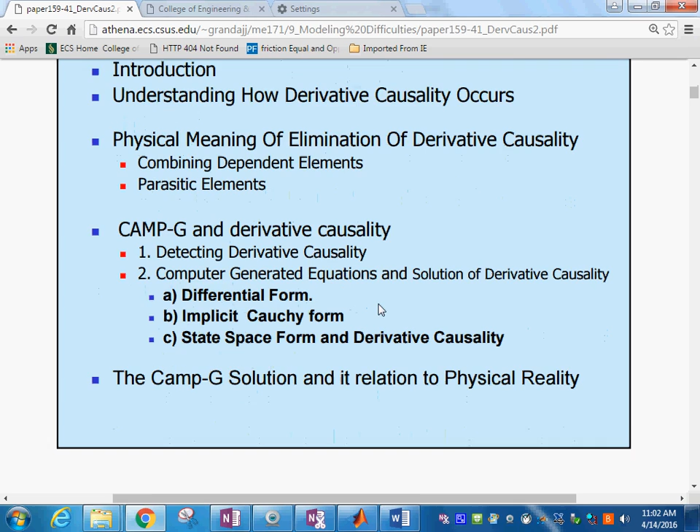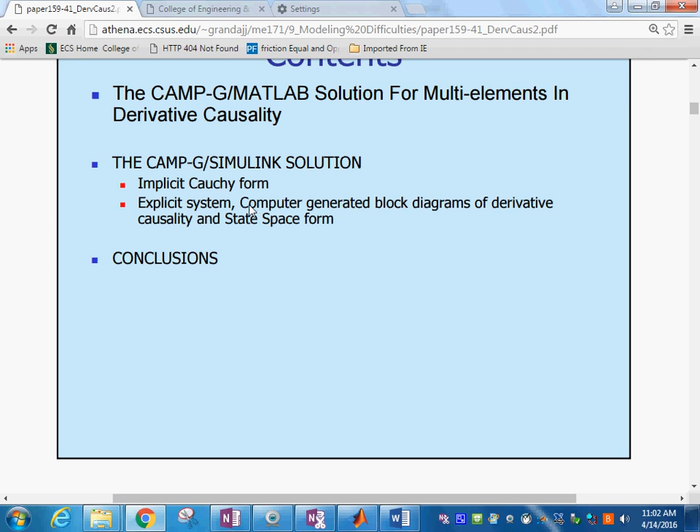And then finally, what's the CAMP-G solution and its relation to physical reality. Then we'll talk about the multi-elements in derivative causality, and I will finally touch on the CAMP-G/Simulink solution.

Okay, because we're mechanical engineers, we like this kind of systems. I am putting here a system that is before you, a system that deals with the valve mechanism and rocker arm on an internal combustion engine, so that you can locate yourselves.

This is the way the intake and the exhaust valve on engines work. What you have is a push rod in here, whose objective is to create a motion this way. And there is a rocker arm in here which is pivoted here, which objective is to rock this back and forth, and therefore push this valve stem down.

And if you do that, you see the airflow, or the mixture of gasoline and air, comes in here, and you let into the combustion chamber. When this is on the closed loop position as it is right now, these two things are not touching, and the spring is pushing this up.

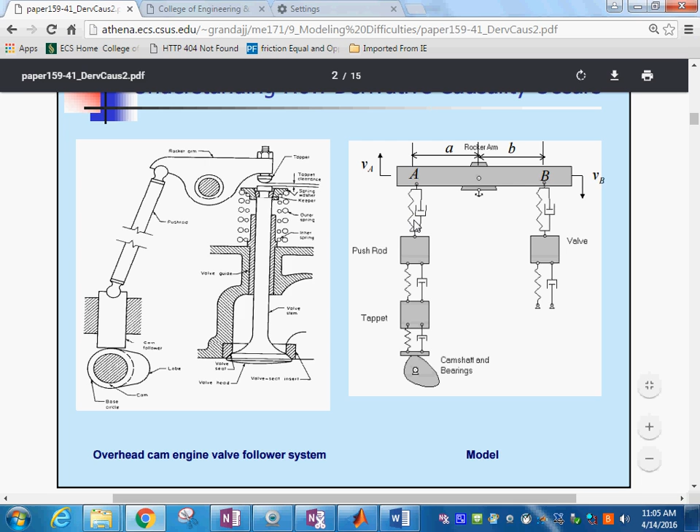Do you see? This is this. Okay. And then on this other side, you have the connecting rod, which in this case we model as a spring and a damper. Then you have the push rod, the mass itself, and that is connected also with the spring and damping to this tappet, and that one has a spring and damping connecting to this lobe, to the cam.

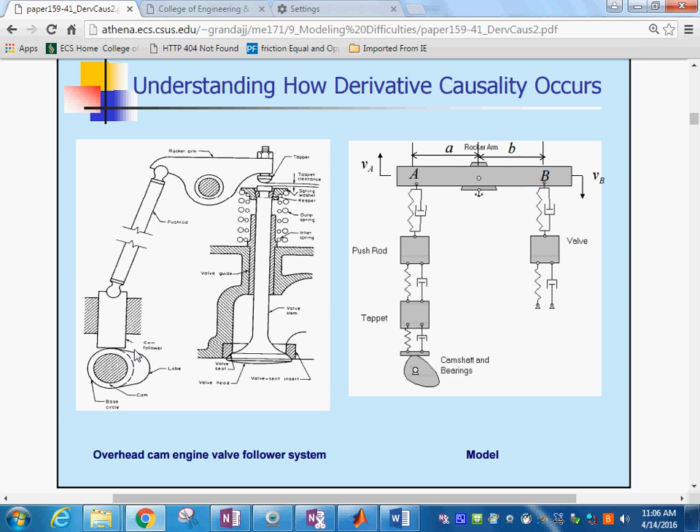So the question is, is our model detailed enough? Is it correct, or is it over-specified, or under-specified? That's the question. So in order to answer that question, we transform the model that we have into a bond graph model over here. Let's examine how we do that transformation.

Obviously, you could see here that I did not start my explanation by saying put the ones here and then do the connections. But if you're doing it and you're studying this, I highly recommend you do that, because that is the way we obtain this graph. So if we review that, you will have that you have a rotation in here, so that's a 1.

You have this point and this point, those two points are ones, and this TF represents this beam, but in here we put another one for this and another one on the other side. Those are these two. You have another one in here, that's this one, and then one with the input over here. So this set is this, this set is this one, and this set is this one.

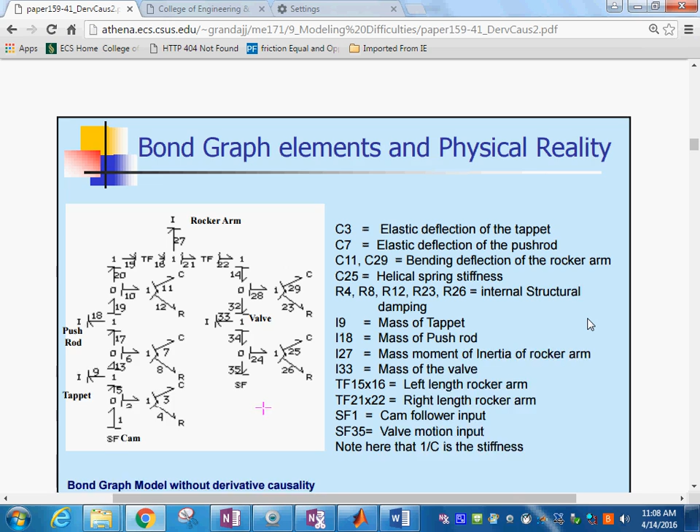So as you can see, this is a more significant model than what we have done in the past. So in here we're going to say, okay, I finally have my bond graph model.

Now on this example, for you that already understand bond graphs, we might not need this detailed explanation. However, just to make sure everybody in the whole world understands, you can put labels to all the variables.

C3 is the elastic deflection, C11 and C29 is the bending deflection. You have the helical spring stiffness, the mass of the tappet, the push rod, the mass moment of inertia of the rocker arm, mass of the valve.

The rocker arm is divided into two parts, left and right, and that way we can consider that. And in the middle you have the rotational inertia.

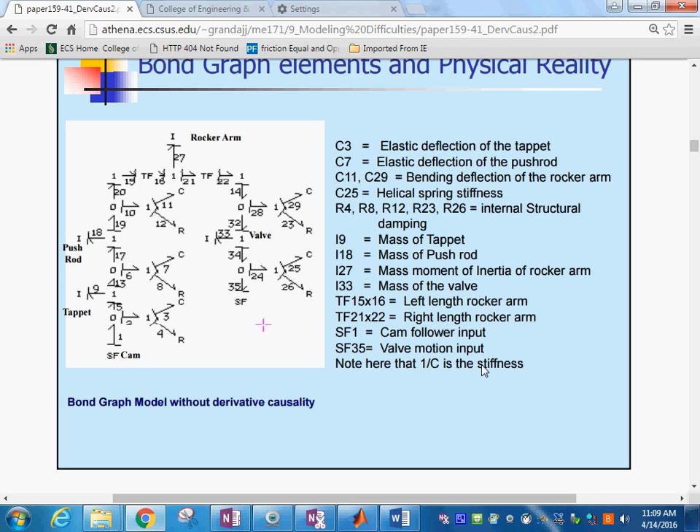SF1 is the cam follower input, and SF35 is the valve motion input.

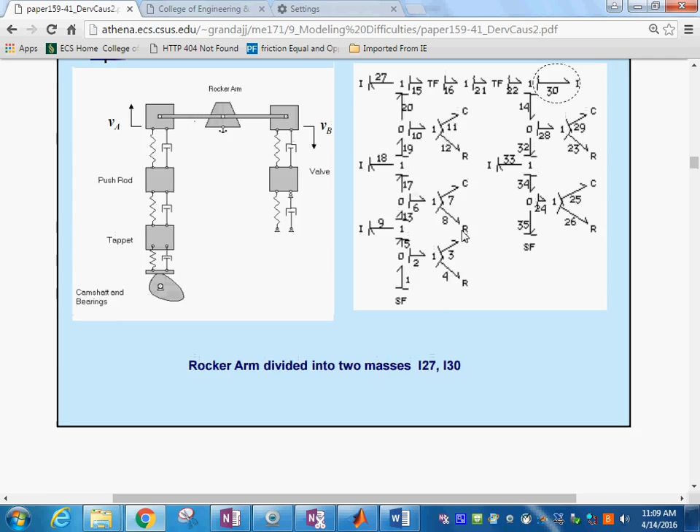From the first representation, this one, see how I represent it here? I am going to idealize and do it this way.

In other words, let's say now the first one, the rocker arm was a lever, and that's very obvious. But how about if I say maybe it's not a lever, I'm just going to model it with two masses concentrated at each end. Sounds reasonable too, right?

If you do that and follow the steps that I have shown you to create a bond graph model, you will have this in here and this over here. And when you assign the causal marks, this one on the right hand side is not going to complete right.

This has happened in other examples that we have seen throughout the semester, but I have been waiting until now to dedicate some time to address them, specifically what the answer is. So you have in here, this is one problem, and that's exactly what I'm trying to do here today, is to resolve it.

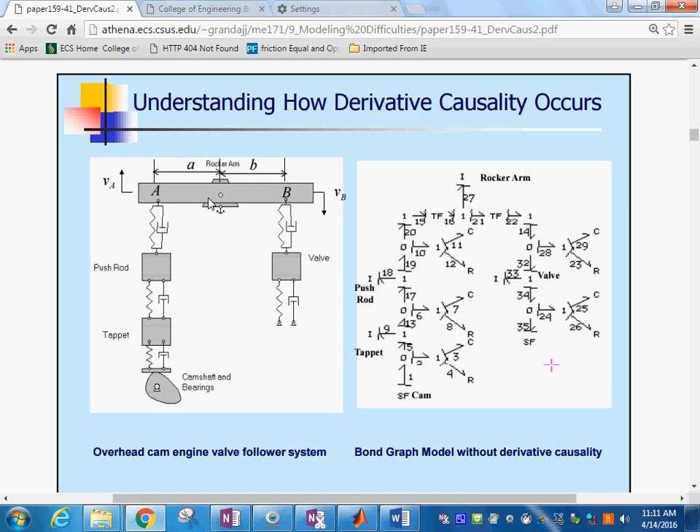Let me put this back again. Remember, this is a different interpretation of what we had over here. And so if I do it this way, I get this problem.

But by the same token, instead of being two masses, you could combine the two and the inertial effect be one mass, but with a combined effect. Then what ends up happening is you have this kind of thing.

See, now you don't have this one, but the model that you have should be equivalent to the previous one. So what I have done is suppress this one over here, but then I have to modify the inertia on the other side to keep the system correct, as it really should be.

It would have been easier to do it with the first example that I have, but because I am trying to explain to you why this happens, the first conclusion on this one is that you cannot have it this way.

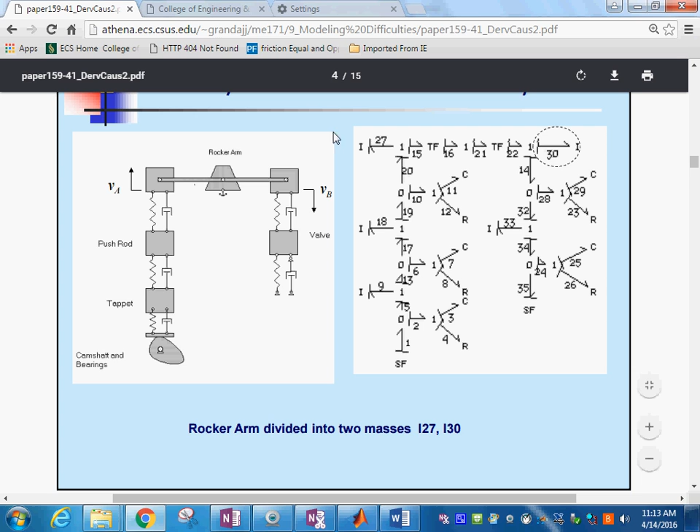It's not two inertias, but one, because this one is depending on the motion of the other. That's why derivative causality happens: when one element, by the way you connected it, you made it dependent on the motion of the other.

So the two are not going to produce independent differential equations. That's the problem. Mathematically, that's what the problem is. You end up with one of these derivative forms saying the equation of that one, which is in derivative, has to be a function of the others.

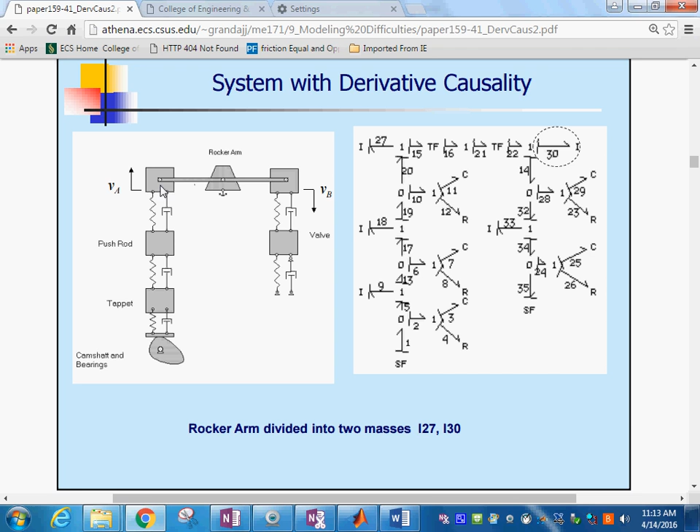It's a dependent element. As you can see, I created that by making the assumption there were two, when in reality we could reduce it to one, but with the equivalent inertia of this.

Just so that I can get my point across, let me give another example of this. Let's say you have an electrical motor. You know that electrical motors have an armature inside, right? A big rotating armature.

Should we consider the inertia of that when we model the motor? Of course, I think that is very obvious that we should do that. But the motor shaft is connected to a flywheel or a gear or some sort that you are driving.

Now you can see the problem. If you model the armature of the rotating motor plus the flywheel as two separate parts, you're going to have this problem. Because you clearly see, if the armature rotates, so does the flywheel, right? And because they are connected together, wouldn't it make sense more to consider both of them as one?

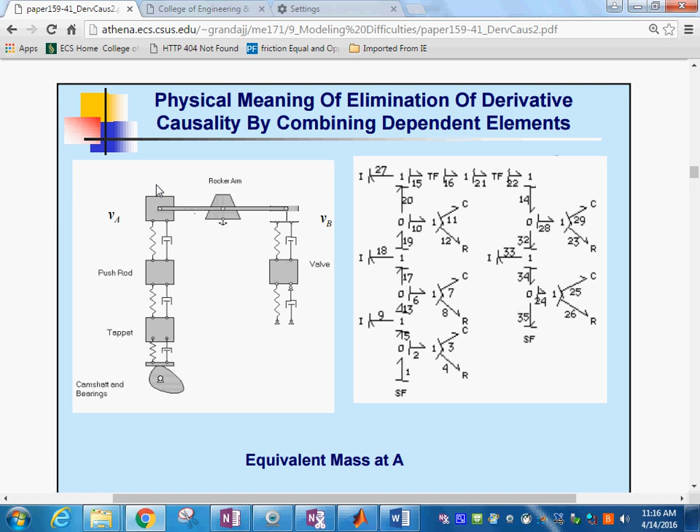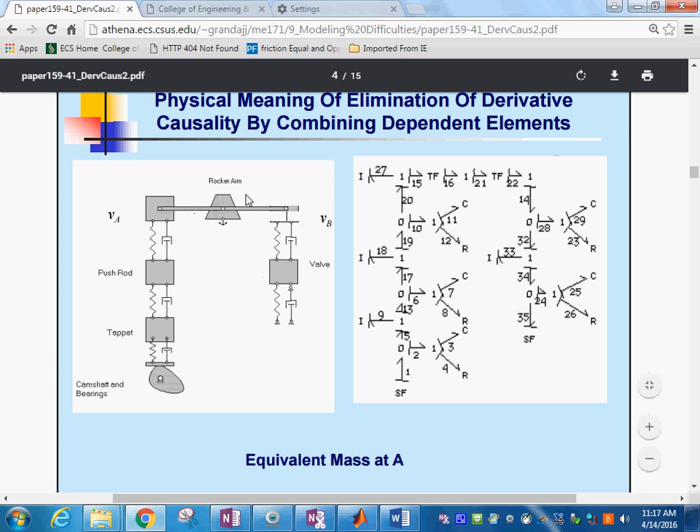Okay, so that's where we are with that. But I thought I'll keep working on this. In order to do what I just did, remember I said instead of considering it like this, I am going to do it like this. Well, this is not arbitrary, you have to have some mathematical basis for doing that.

And the way we do it is by equating the same kinetic energy. The kinetic energy on this side should be the same as the other side. We have a velocity ratio in there. And then if mass B is placed at an equivalent mass at A, then the mass at A has to be mass A plus B over A squared times mass B. So the value of this combines the other one with this geometry.

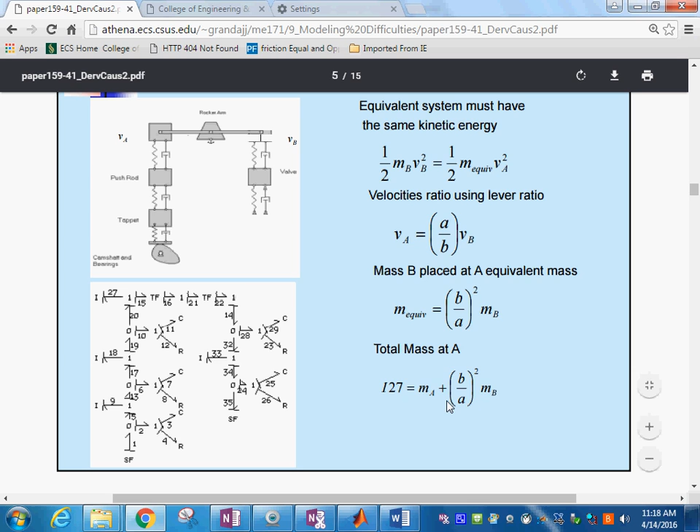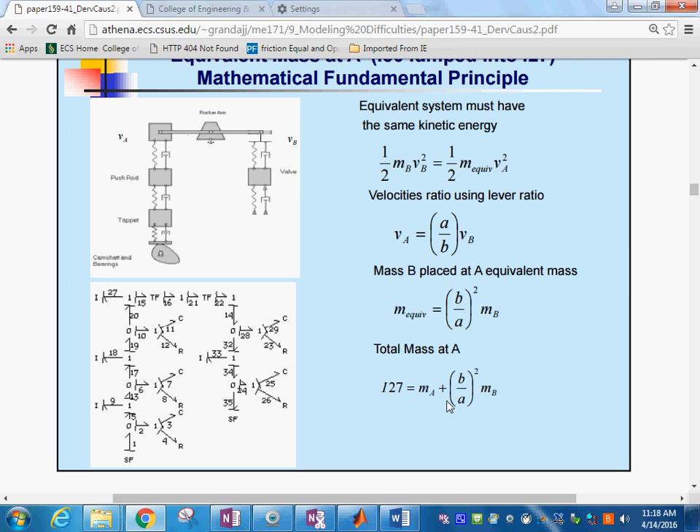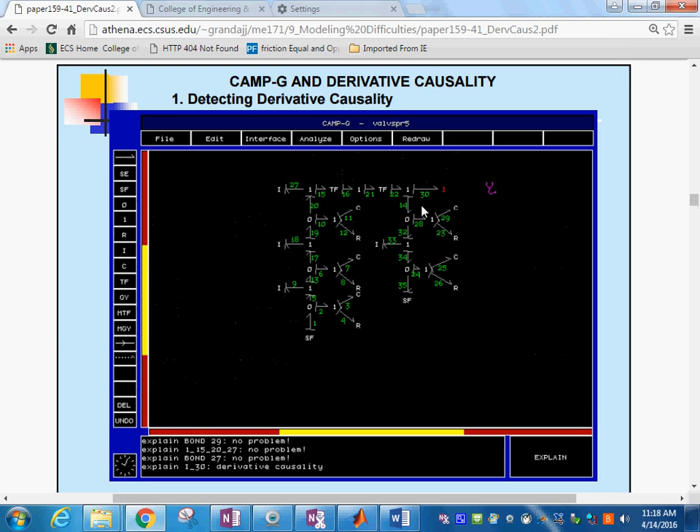When you study calculus, I'm sure you came across these equivalent inertias. Look, if you put it into the equation, the first way was, do you see the derivative form right there? See? And you know this is going to have problems. But if you suppress that and change it to this, then you won't. The only thing you gotta do is make sure the value is like this.

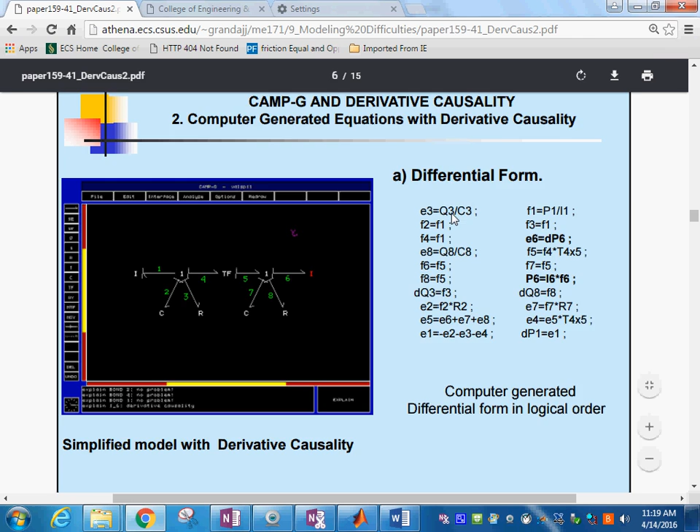Now let's try, for the sake of example, a simple example as if we have a transformer with a dependent source on one side. Now I want to go from the complex example we had to a simple example in order to explain the mathematical foundation for this. And here, if we produce the equations, the individual equations like this,

you produce two of those equations that are funny, because E6 is dp sub 6. Do you see, dp's on the right hand side? That's not cool, because it means the derivatives dq3 and dq8 are fine, but the derivative on the right hand side is caused by this derivative causality. So we really have a major challenge now, that the derivatives, instead of ending up on the left hand side where you can calculate, you need to evaluate the derivative first on the right hand side to do the others, because we know it's a dependent derivative. So that's not helpful, to get one of these on this side.

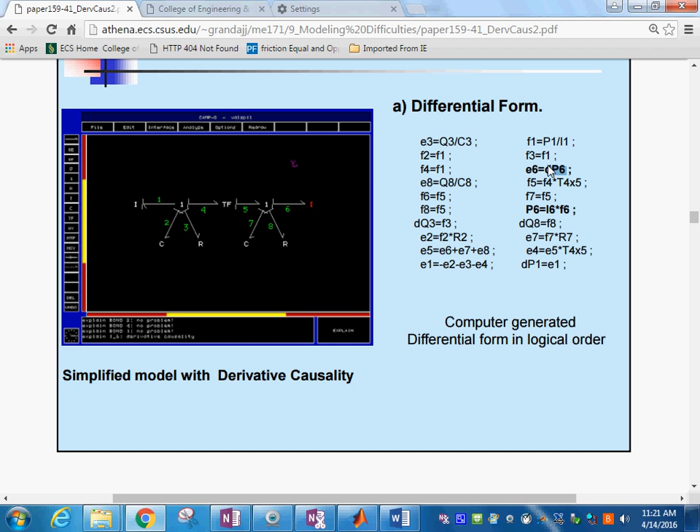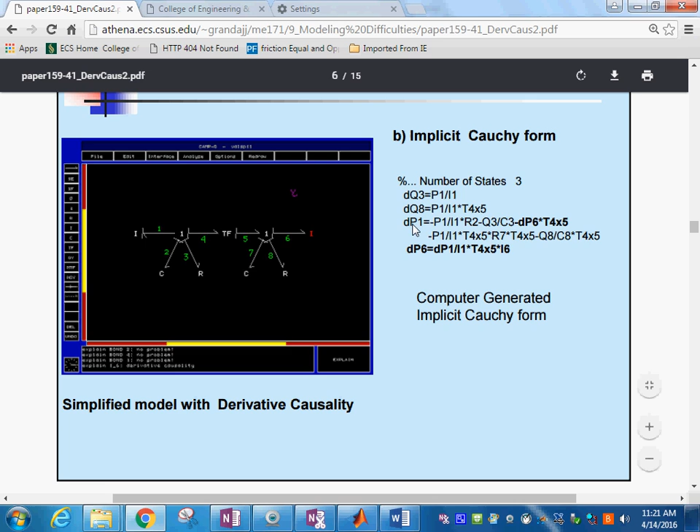Now, if we write them into the Cauchy form, which by now you know what it is, we have actually replaced all the e's and f's, and we only have the derivative form. If you do that for this example, you are going to end up with these three equations and this one on the right hand side. Not cool.

So in order to solve this impasse, you need to find another equation for this by hand. But if you find out this is going to have dp1, you begin doing something like this and you're in a never-ending circle.

When I worked for IBM, I think it was the first week I was there, they gave me one of these problems, the circuit, that they said, well, we don't know what's wrong with this. If we keep going here, the equations don't come out right. And when I did the bond graph model of this, I recognized this is a derivative form, an algebraic loop, and that's how you resolve it.

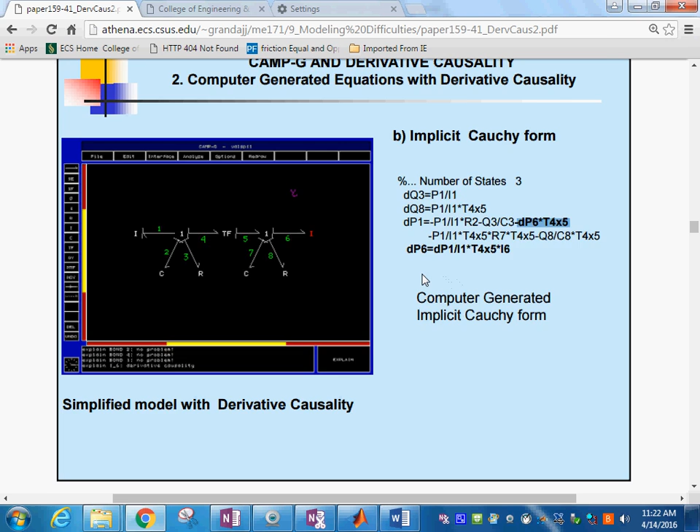In here, I am going to propose something. We need to find some way to transform these equations that we have in this not so nice form to ones that are in the nice form. So here's the idea. Do you remember that state space form has this format?

And that's what the bond graph produces, especially in CAMP-G. That's exactly what it does. But in here, you have first the normal ones, and then you have this dependent one, and you have it in such a way that you can't resolve it. So here's what I did, and here's what I propose.

Let's just do the minimum on this. The minimum. All I did is let's just represent the system as it's in here, and we are going every term. A and B is the normal one. Every term that has the dependencies, we're going to call it E. And this is this x dot of derivatives.

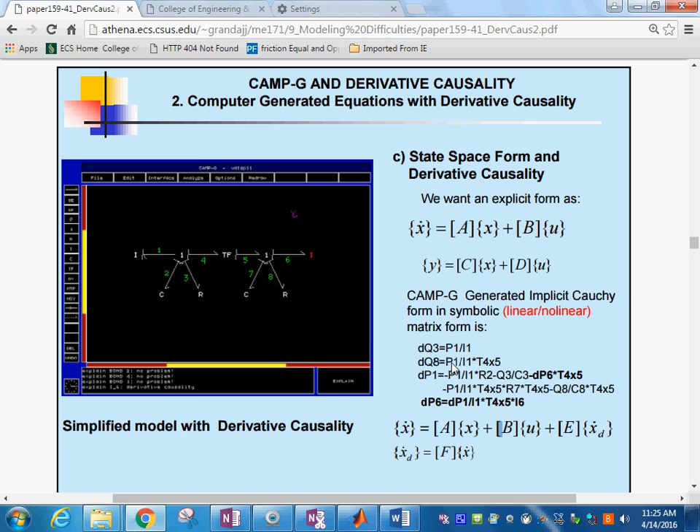This solution, I found it a few years ago, so it's not this week. I already tested and published this work in a conference many years ago. So here's the idea. This is our mathematical problem, right? I said, okay, if this is the case, we're starting over here.

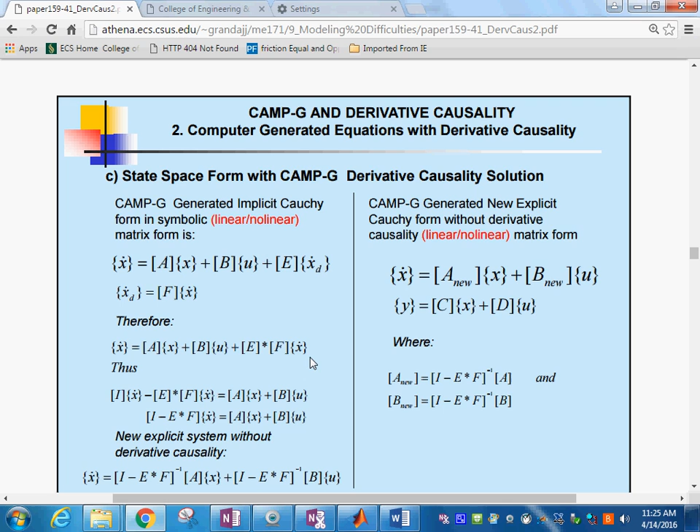We could put this into here, see? And if you do this, you have this equation. And because we want them in explicit form, we could move this term to the other side and obtain what we have in here.

But if I take the inverse of this factor here, if I take the inverse of this, I would actually produce the nice form that we want. Sometimes you have to do it that way. You have to produce new matrices.

So I said I produce one A new and one B new, and we will have to produce one C and D as well. See? So this is the new A, this is the new B. So even having the derivative form on the right hand side and putting it in this form, by doing a matrix inversion with this matrix product, voila, we solved the thing.

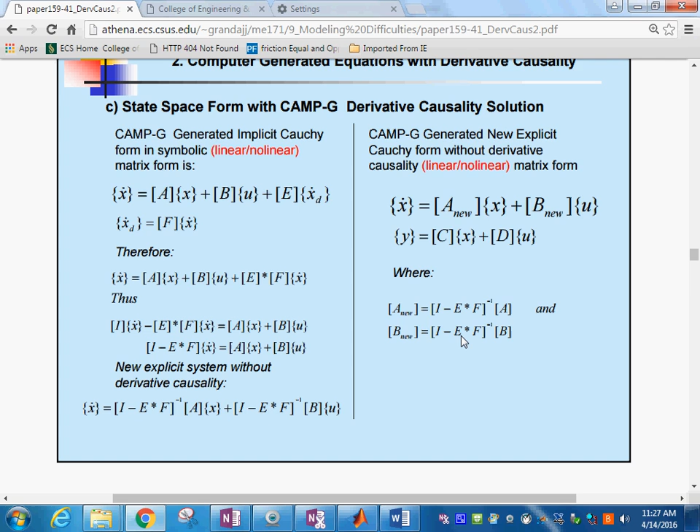But this slide that I'm showing you now shows you the mathematical side of doing such a thing. But the picture here showed you, if you take this one off and move it to the other side, it shows you the physical aspect of it.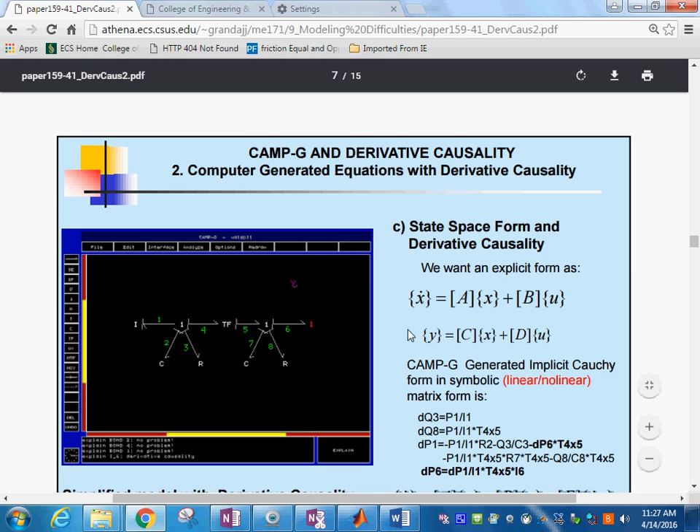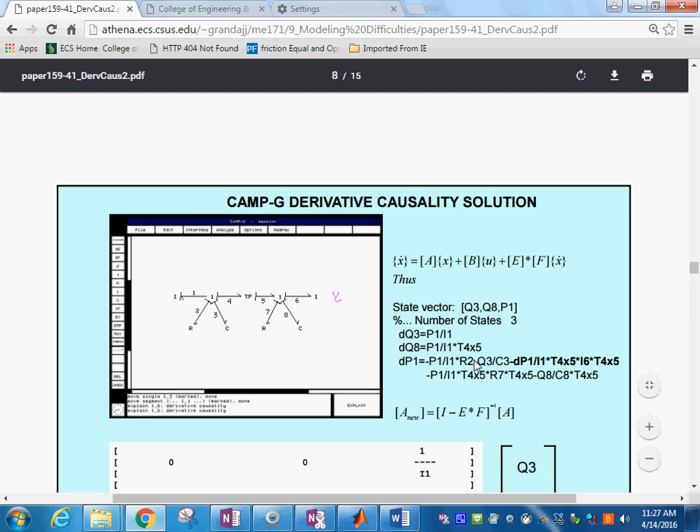So I wanted to do this. You see the derivative form. I got this out of the CAMP-G software. And then I actually did exactly what, because MATLAB is very good at working with matrices, I obtained my new A, see?

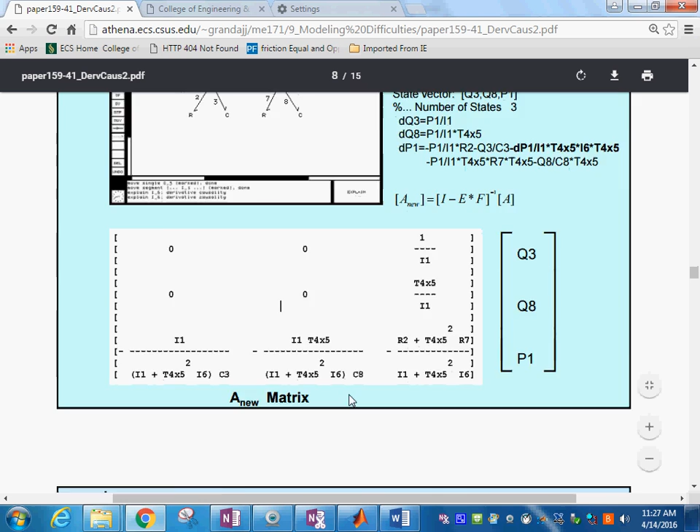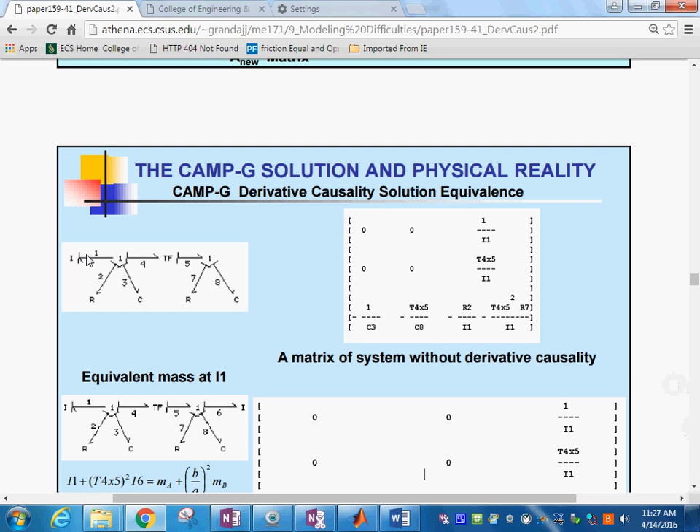And that means now I don't have it in here. And then I put it over here, see? And then we don't have problems with derivative causality anymore.

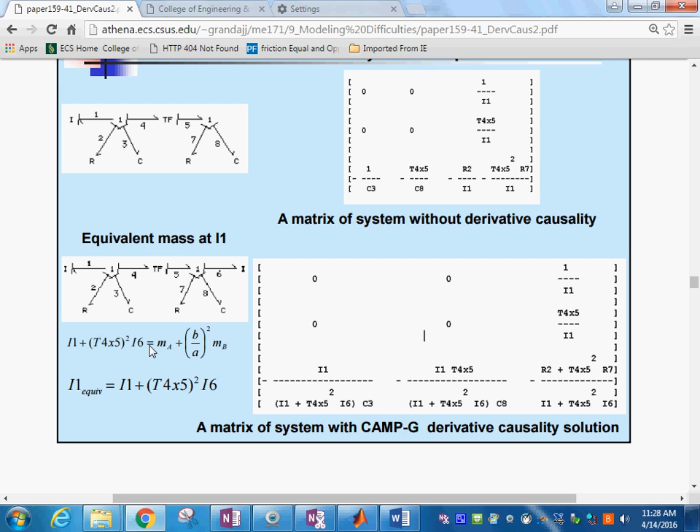Now if you want to put an equivalent mass on the other side, this is the same thing, see? I said I am going to keep causing trouble here, because I wanted you to see physically the changes you can make to a system, and you can mess it up very easily.

See what I have done now? We connected the two masses as if the push rod would be a rigid body, with no spring or damping at all. You can say, well, that's really closer to reality, because the push rod is a push rod, not a spring. Well, yes, that's true.

But be prepared. If we do this, see, I have done it here, and I did it over here, and I had it like this too, with 3 elements in derivative form. Now we really have a little nightmare, because now we have 3 elements in derivative form. The equations are not going to come out, they're going to be dependent.

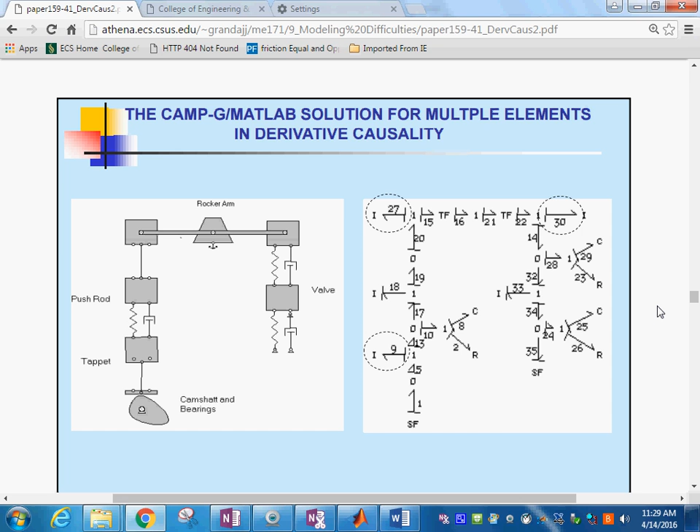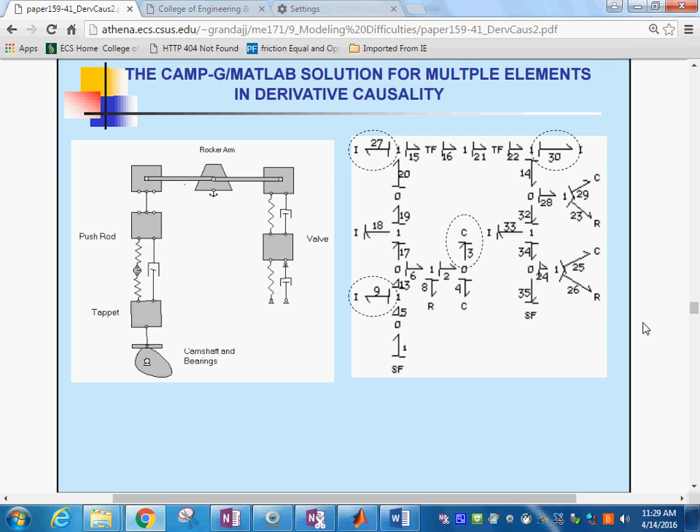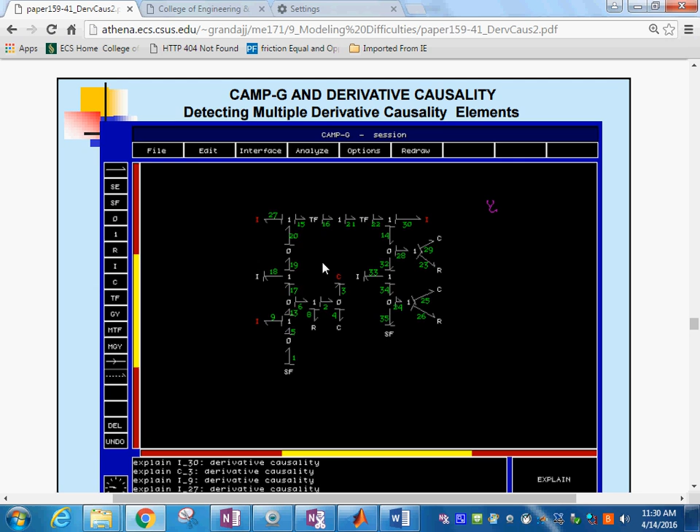So I think what we need to do is to find a solution as I have proposed, either by mathematical matrix inversion, or you could solve it. Let's see, right there, I put it into CAMP-G and it shows 1, 2, 3, 4 elements in derivative form. We've never done a problem like this in this class. Maximum we had 1. But now that we are talking about a full-fledged solution, then okay, these are the equations.

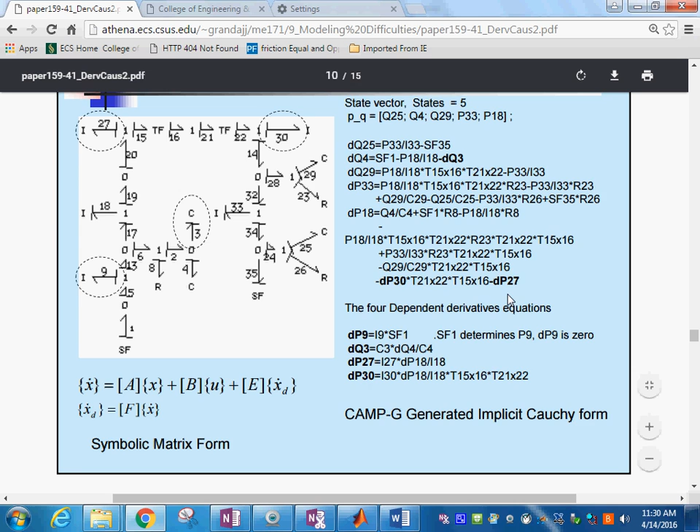for this one that has 4 derivative forms. So this is the part that doesn't have problems, and then there are the ones that do. See, on the right hand side you have dQ3, dP30, dP27. So we have derivatives on the right hand side. So it's 27, 30, 3 and 9. Where is the derivative on 9? Yeah.

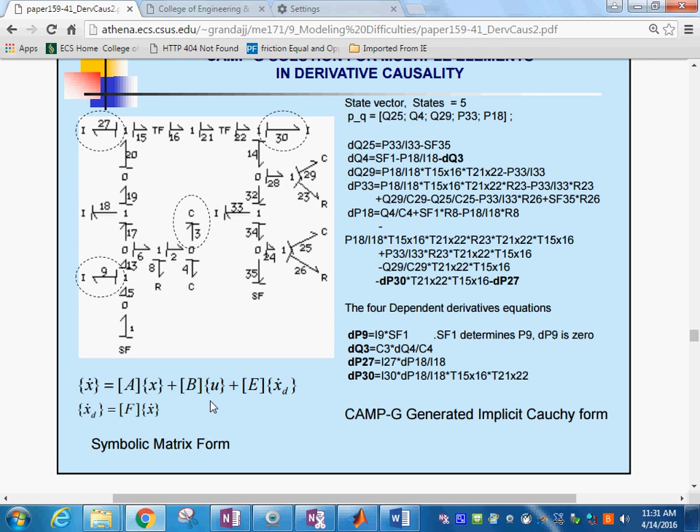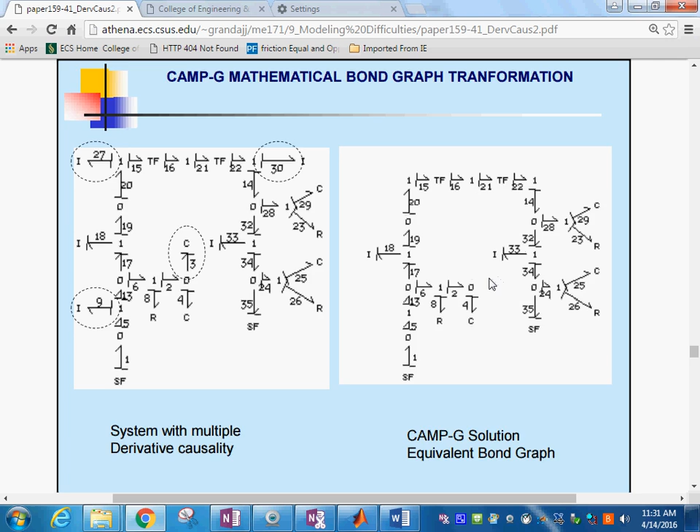Okay, so we have this form. And what happens is if you combine these two into one, and you combine these two into one, you will have the... in other words, this inertia is going to see this, you combine the effects, and so you eliminate the elements in derivative form. You will end up with a much more complex matrix, but so what? The computer is the one doing it. And so in here, this is the solution for multi elements in derivative form.

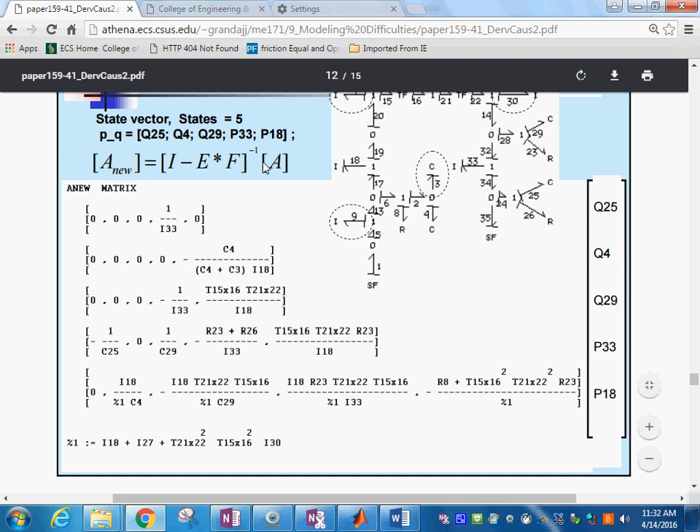In this case, you have the new A is I minus E times F inverse times A. This is the B matrix. Obviously it gets a little more complex, but the same way I calculate the new B. And I have solved this. You will do the same thing for the C and the D matrices.

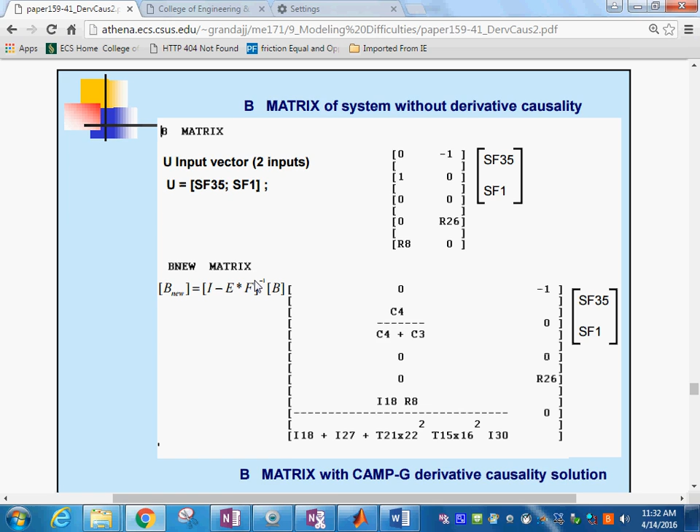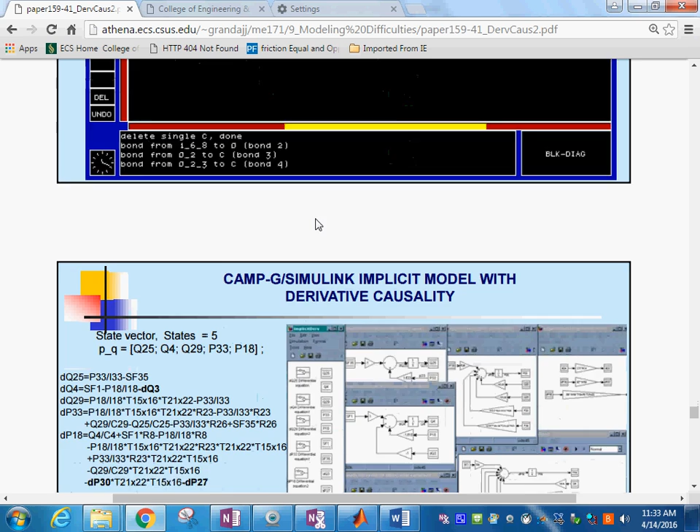Okay, let's take a look a little bit about the CAMP-G Simulink solution. You have this element that I have in this problem. If you click into one of the elements, it displays you the CAMP-G solution. In this particular case, when you have derivative forms, you could represent this whole thing into Simulink. You see?

What I'm trying to say is that you could have a Simulink model with derivative form. And actually, once you do it this way, you could solve it, because Simulink has an implicit solver of the differential equations. So I think that is a solution.

So you begin to see why, before we didn't want to deal with this because it's involved. But it's not like it's impossible. You just need a little more work and knowing exactly what you're doing. But this is an option. I'll just put all those in Simulink and let Simulink hash with it, and then it should work.

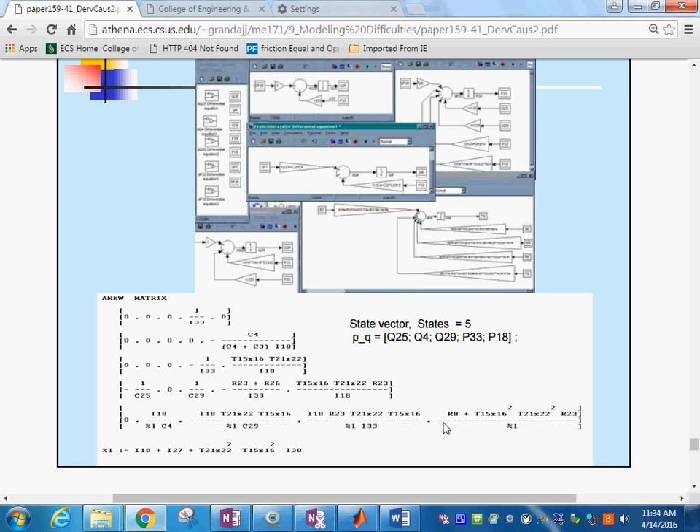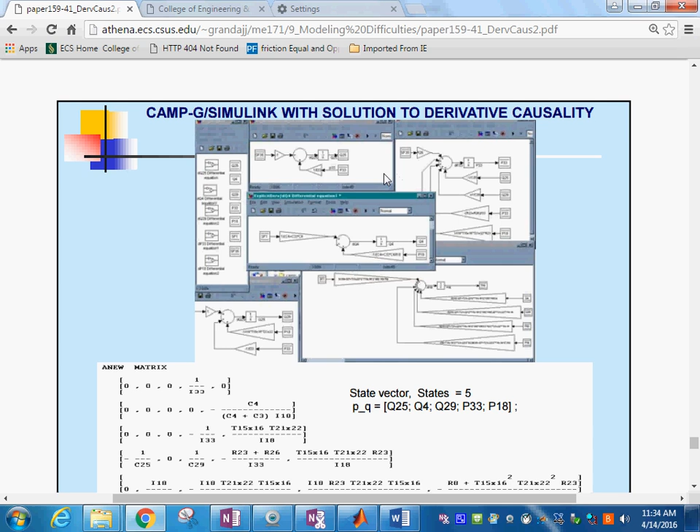This is the Simulink model from the bond graph. And then this is the same thing as if I would have done this. So this is one way, but you could produce the Simulink derivative form, and then of course it does it in the whole block diagram. That's what these are.

See, all these gains are big because of the equation. They come from here, from these equations right here. Remember, all Simulink is a graphical representation of the model in integral or derivative form.

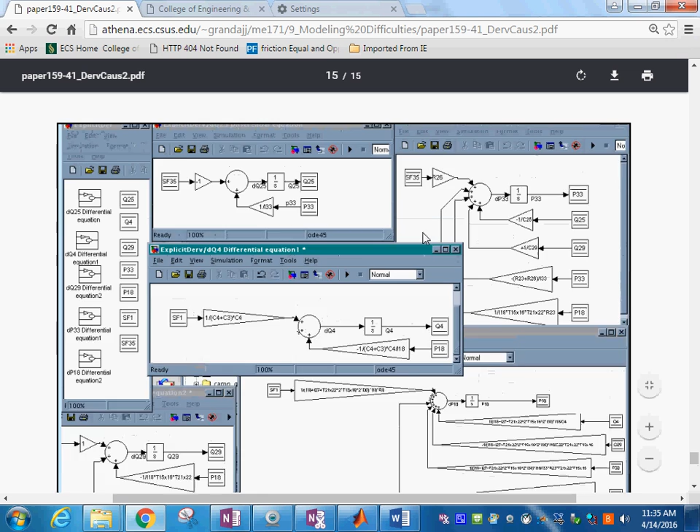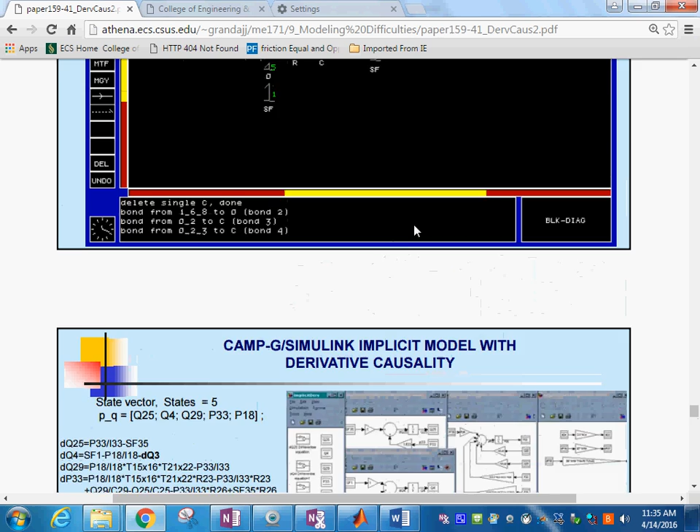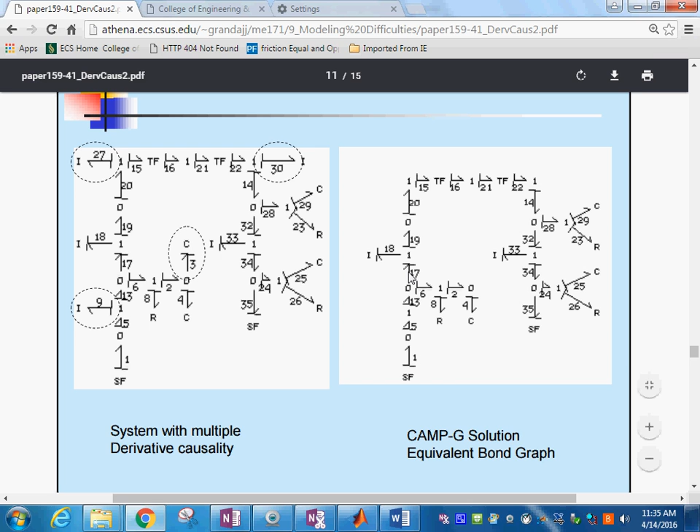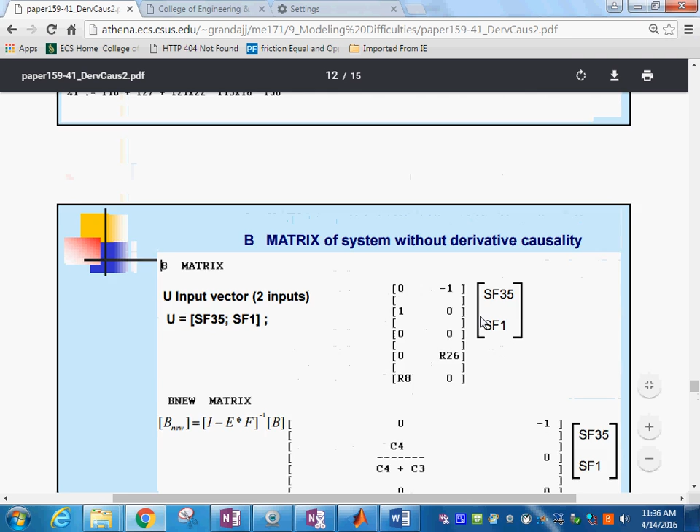So my feeling is, and the lesson for this, is that maybe even this one is a little bit risky in the sense that there might be some numerical instability or so. But the best way that I suggest is to combine elements, combine them together. I think I have a slide of the combined elements. Yeah, here, see, equivalent one. So you go and change this, not just by erasing them, but by making this equivalency. Or like I said, once you have the equations like this, you can go into the Simulink model and solve it as well.